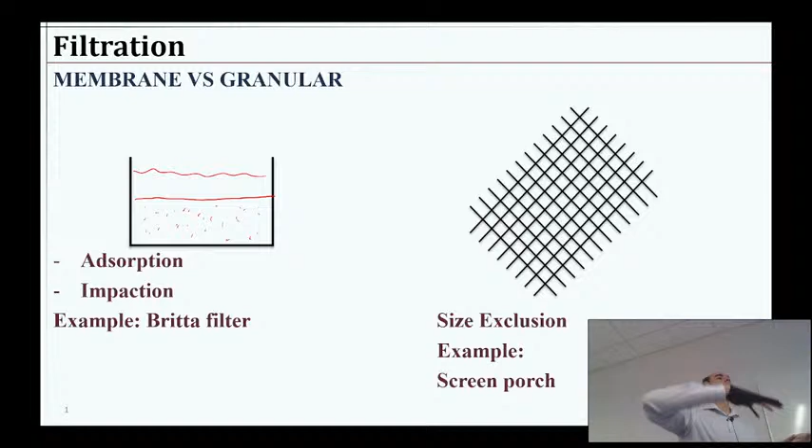Now, in water treatment, sometimes we'll pack it into a column like that for something like a pool. For larger systems, a lot of times we'll just simply let the water accumulate on top of this bed of sand and let gravity drive it through. Of course, we have to pump the water up, so we're using some energy, and the water's coming in and traveling through and being collected out the bottom under normal operation.

Now, these filters have to be backwashed with some frequency. So a lot of the design challenge is how do we know we have enough filters to handle routine maintenance? If they're going to be backwashed every 2 days or something, then how do we know we have enough filter area to accommodate?

So the math for this part of the class is going to be rather straightforward, but it introduces a nice concept of flux of water across that filter, which is the same type of concept we will use for membrane filtration, which we'll come to later. But just as a quick little thing, a membrane filter operates like a screen, like a mesh, where you have a particle in water and it's traveling and it gets stuck as the water travels through and cannot make it across.

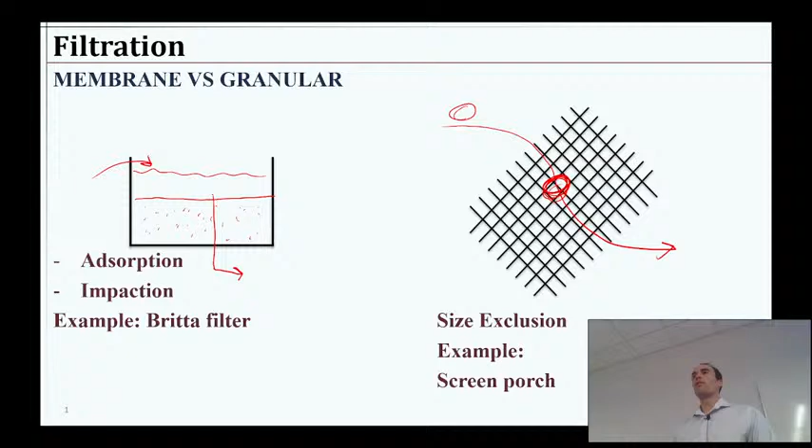That's a little different than sand. In the sand case, we're actually allowing the particle to stick to the edges of the pores or stick to each other and accumulate and grow into larger particles that then get stuck. Most of the granular filtration is not actually size exclusion because the pore sizes are relatively large, but it allows for a lot of area for these particles to stick to the walls, to the sand, to whatever else. And that's very likely because we've destabilized them.

So part of that coagulation flocculation, that coagulant destabilizes the particles, so it helps with sedimentation, but even after then, these particles are still sticky, and if a few of them make it through without gathering into larger particles, now they're happy to stick to our sand. So it kind of does a dual action for us. So it's very common then to use sedimentation, coagulation, flocculation, sedimentation again, and then granular filtration. It's very routine because it just works so well together, and most of that's using gravity and a bit of chemicals.

Okay, so a couple common examples. We can think of actually coffee grounds. So as you pour water through coffee grounds, the grounds are kind of like a media bed, except they're going to release stuff, right? You want the stuff to soak out of the coffee grounds. But they could potentially filter something if you had, let's say, some leaves in your water and you poured it onto some coffee grounds. Well, the leaves are going to get caught, right? So that's the granular filtration, sort of. The coffee filter would be like a membrane because it's physically excluding stuff.

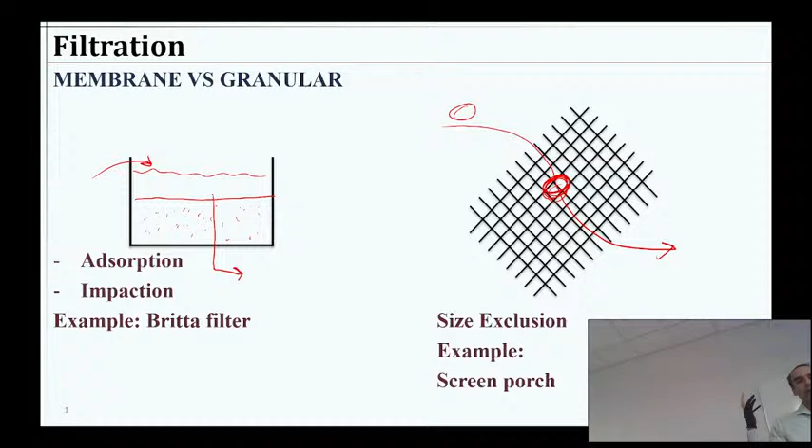That analogy is not perfect, but you've seen Brita filters. It's a better example of this granular filtration. It's allowing space for chemicals to adsorb onto the carbon that's there. Soil's another example. And the coffee filter is a little bit more like the membrane because it's excluding particles based on their size. You can get some really fine particulate matter to go through, perhaps. Or a screen porch trying to keep mosquitoes out.

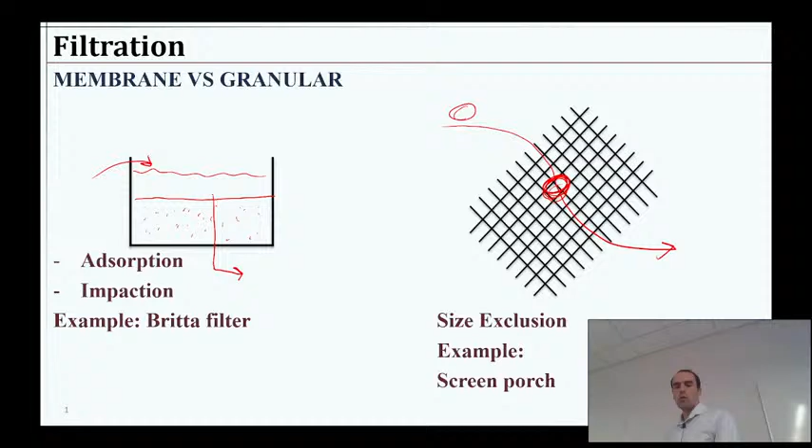Okay, so today we're going to talk about the granular filtration then. I mentioned it's usually not size exclusion. So if we think about what the media might look like, it could look something like this, where we have a particle here. Size exclusion, yeah, it can happen if you have a large particle. Usually those large particles were removed from sedimentation, but if they're there, it could get caught and separated. More often, you're going to have an assortment of different processes that we could talk about.

You might have flocculation within the pores, particles meeting each other. You might have direct sedimentation. We talked about the big sedimentation basin. The particle has to travel some distance before it hits the ground and then it's separated. Well, there's very small distances to settle inside these pores. So if it just settles a little bit along its way and makes contact with the surface and sticks, then it's sedimented just inside the pores of the granular media.

You could have interception, where it's not exactly sedimentation, but as the water is moving along the pores, say here's a granule, a particle along the way ends up hitting the edge because it doesn't move out of the way in time, kind of thing. The fluid just kind of ends up bashing it into the side of the pore wall there. And so you could have interception like that, or impaction, where kind of the same deal, the water moves and the particle slams into the granule.

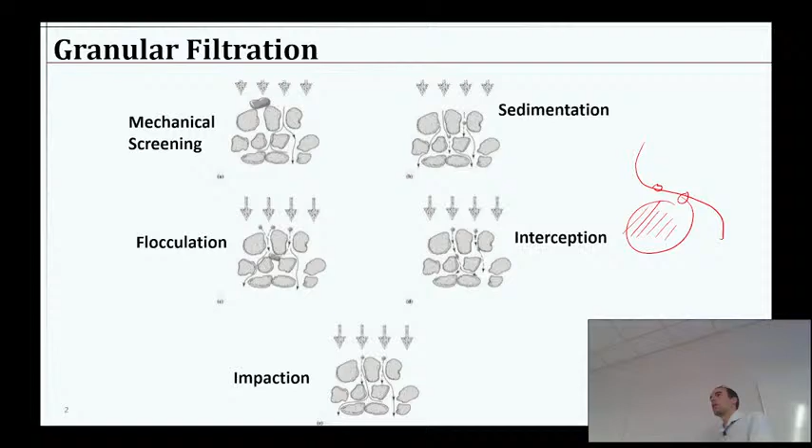It's a little bit like using Velcro, right? Adsorption processes are a little bit that way. If you have some Velcro and you shove a lot of dust and fuzz on it, eventually all the sticky spots will be filled until you remove all the dust and fuzz and stuff. Then it could be sticky again or grabby.

So that's going to be the same type of concept that's happening in granular filtration. Now, here's a couple examples. Normally, I have this pilot system in my lab. Somebody's borrowing it to use it for some test stuff; a consulting company's borrowing it right now. But if you're very interested, I could probably hook you up with a visit to go see it wherever it is. It's not too crazy of a system.

This one's 3 columns packed with some granular media. You can see them, in practice might look something like this. We'll look at a few examples as well in a moment that are the bed variety. So I mentioned these would be the column ones. The reason you might want a column, you could probably push it a little higher pressure, meaning higher flow rate, but there are some limitations.

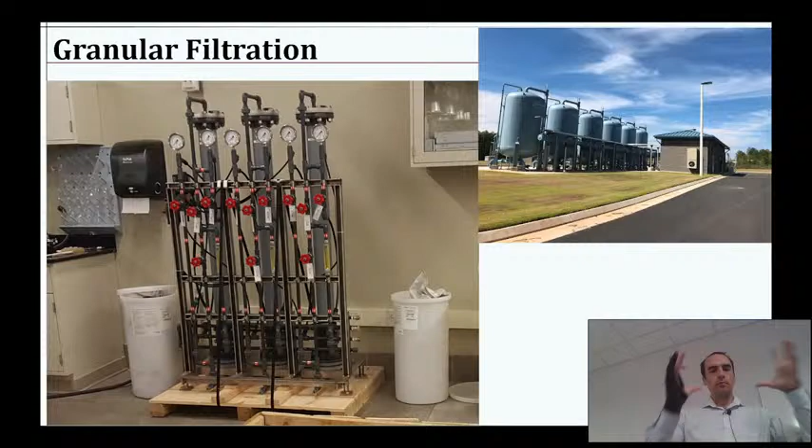If you put too much pressure, eventually the sand is just going to give away and fissure, and then you're not getting any filtration. It's just channeling through it the most direct, shortest path possible. So you have to operate these in a careful manner, to prevent any short circuiting or anything like that. But a confinement like that does help.

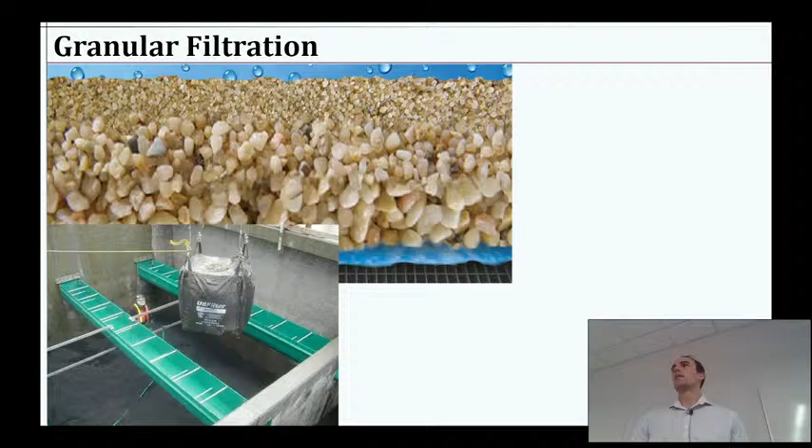So considering how well the media functions, does it ever need to be replaced? How sticky is it, given the type of particles we have in the water, things like that. Operators might have a few choices on, okay, how do we design this? What are the cost benefits? And they're going to need a lot of that material. And ideally, you don't ever replace it. And so in operation, you're doing your backwashing in a way that you shouldn't be losing any of this sand. You shouldn't be flushing it so fast that your sand is escaping with the particles.

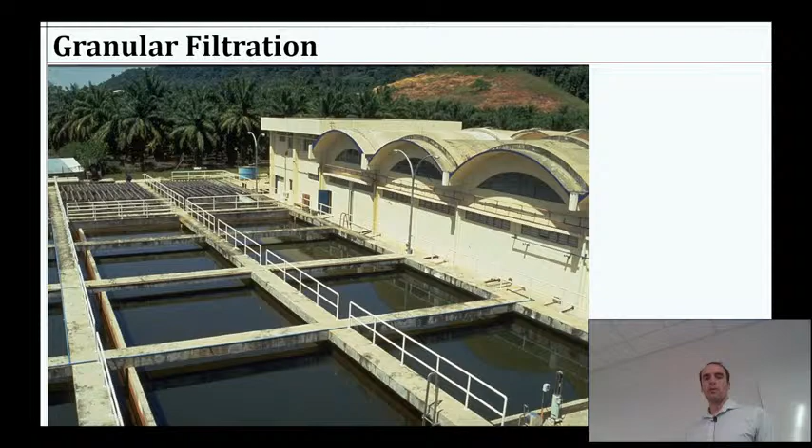A few more examples of what it might look like. I have no idea where this is, but it looks like a nice place. You can see these are just large beds, and they just have water piled up, and the water looks pretty still, and perhaps that would be a sedimentation basin, but I think these are multiple granular filtration beds where water is seeping down through continuously, and eventually they would stop that and backwash it. We'll give some examples of that.

Okay, so when did we first start using granular filtration? Well, as soon as we were using groundwater is the simple example. But really, in terms of intentional treatment, I think the earliest sand filters were actually what we would call today slow sand filters, or maybe bio sand filters, meaning that we give the water a lot of time with a high surface area material. There's going to be some of that filtration, but because we didn't have the sophistication 150 years ago to backwash and pump stuff, we would let bacteria eat all the particles.

And so there'd just be continuous bacterial activity as we're letting water go through. And that's not a great thing because we've then got a lot of bacteria around, but hopefully it's at least going to remove a lot of the particles, and the bacteria that are growing in the sand are not so likely to be the same bacteria that would give us an infection. So it'd be a little benefit, better than just taking untreated water. So that's even today sometimes used for biological treatment, but not really something we use for drinking water anymore. So that's kind of the history.

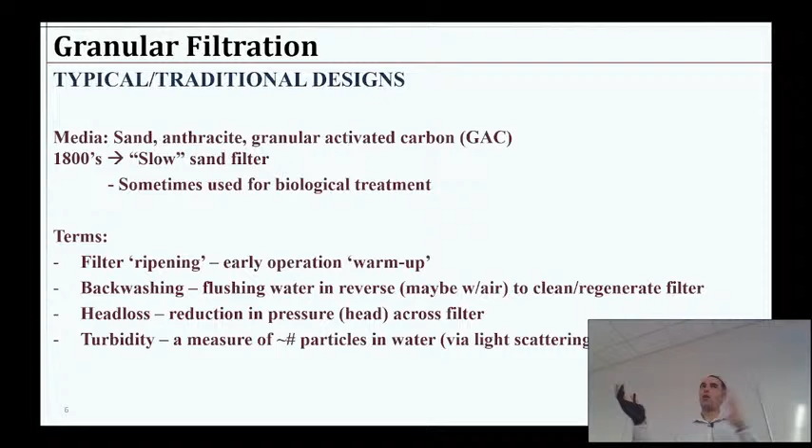during operation, you can imagine if all the particles were just jostled about and backwashed, there might be some junk still hanging out. You have to get rid of that before you're ready to use the water. After maybe 20 minutes of operation, or in the case of the Brita filter, maybe like 5 jugs full or something, you see that most of those gross looking particles are gone, and you're like, okay, I guess it's safe now, right? It turns out those particles are pretty safe. It's just, you don't want to drink them, right?

So in that case, that's the ripening stage. You have to flush out all of that stuff. It's kind of a warm-up or acclimation step. This is dirty water coming out at first. So we don't want to use that. So that water goes to waste. That's not something we're going to use for our drinking supply.

Then there's backwashing. That's kind of obvious, self-evident. We're going to use treated water because we're trying to clean these filters. So we're going to use treated water, which means we are consuming some of the water we just produced, and flush it in reverse. We might also do an air purge. We'll see an example of that. And that's going to clean and regenerate the filter. Now, ideally, we can do this ad nauseam, as many cycles as we want. And that is generally the case.

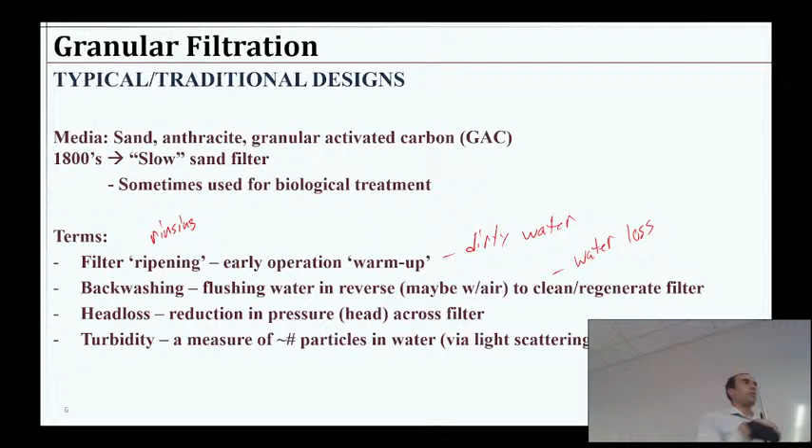So if you think of visibility through air or into water, any of you travel out into the ocean, like way beyond the Mississippi effect area, just way out. So if you travel far away, like into the Gulf or into the Atlantic somewhere, if you get away from all the sediment that's in the water, you'll end up finding very clear water. Certain locations that don't have much sediment, even close to the shore, can be like that.

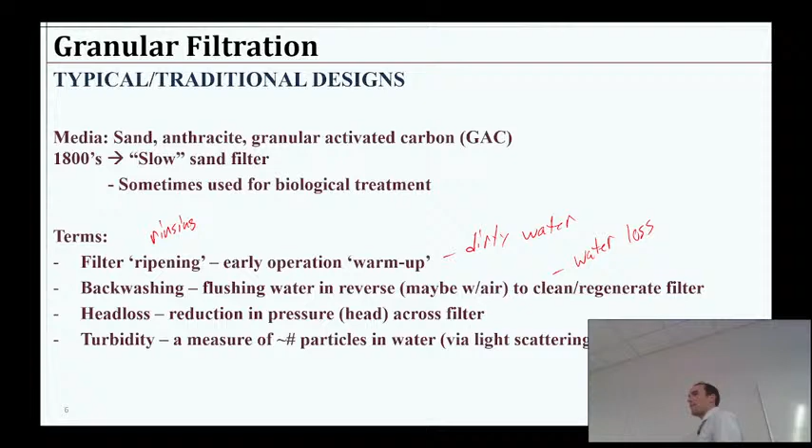Certain natural springs, not a lot in Louisiana because we have mostly sediment here, right? Years and years of sediment from the Mississippi everywhere. So in some places, you'll find water that you could see 20, 30 feet through, right? It's nice, clear, looks like stuff you might want to drink. Other times, you'll find water that is very cloudy or murky, and that's turbidity. So turbidity is a measurement of that light scattering caused by particles.

Another good example would be if you take tea and it's been filtered nicely, you should be able to see through it even though it's colored. That's different than having a brown muddy color, meaning you can't see through it like you can see through tea, right? You could look at rivers in the same way. If you have a very low turbidity river, but it might have a brown stain, it would look brown, but you can see clearly through it. That's possible.

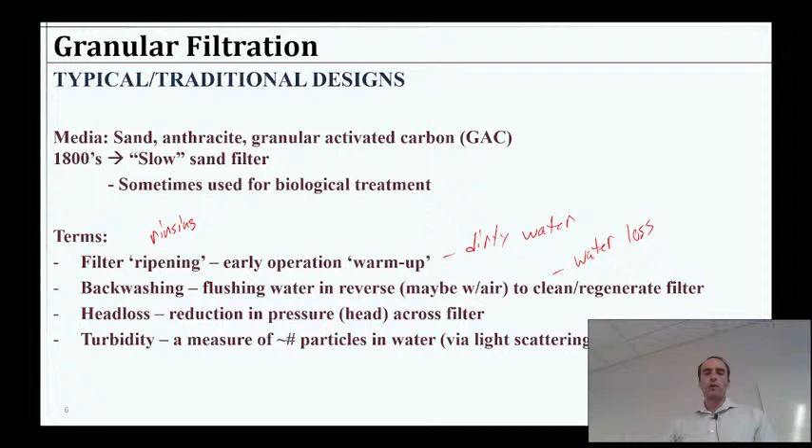So milk is very turbid. You can't see very far through it. There's particles scattering that light. Okay, so turbidity then is a measure of particles in the water. It's like a concentration kind of a deal. It has this funny unit that we call nephelometric turbidity units.

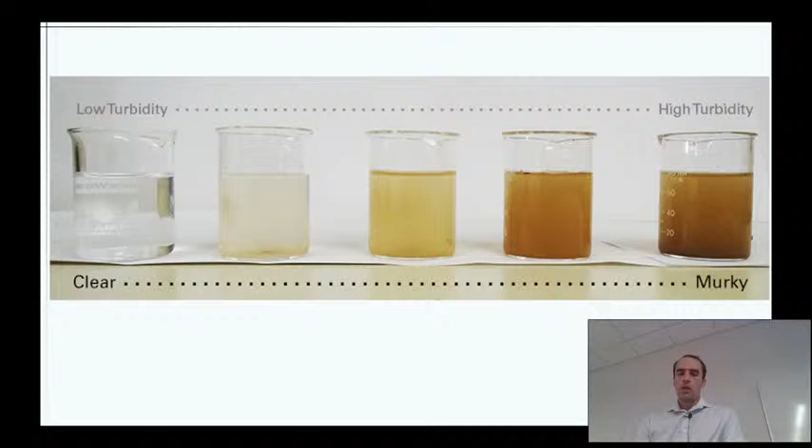Good example here of turbid water. So we have clear and increasingly high turbidity. Again, it's basically saying murky. Okay, it's just the technical term for that. A way to measure it is to measure how far you can distinguish this, like a black and white edge, as we see on this little Secchi disc thing. How far through the water is your distance, is your visibility.

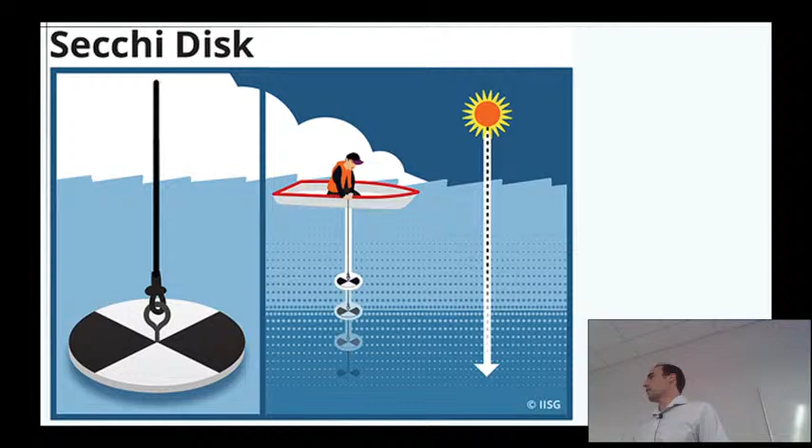So people will literally go out and measure that with a rope and see, okay, at this point, I can no longer really distinguish what's the white part of that and what's the black part of that. And that's a simple way to see what's your visibility, and then use whatever metric to say, okay, that's this number of turbidity units. So it's a little bit arbitrary seeming in terms of how we define the units, but we can quantify it with the amount of light scattered in that manner.

So it might look something like that. And as you see, you can imagine if you drop that further in from that point, it's probably going to get to a point where you can see that it's there, but you can no longer see exactly where the edges are of the black and white spots.

Okay, so then probably the most important variable for our granular filtration operation is what frequency do we backwash? When do we backwash? How long is it going to take? How much water are we going to use? What's the impact of that backwashing? That's going to drive a lot of our design for a granular filter.

So in order to determine when we backwash, there's kind of three methods, and usually we'd use at least two of these. One would be head loss. The next would be just a simple time limit. And the last would be monitoring that turbidity. Because if we have turbidity coming out of the filter, we know that our particles are starting to escape. So that's going to tell us at some point we need to wash because the filter is kind of full of particles and they're starting to make their way through.

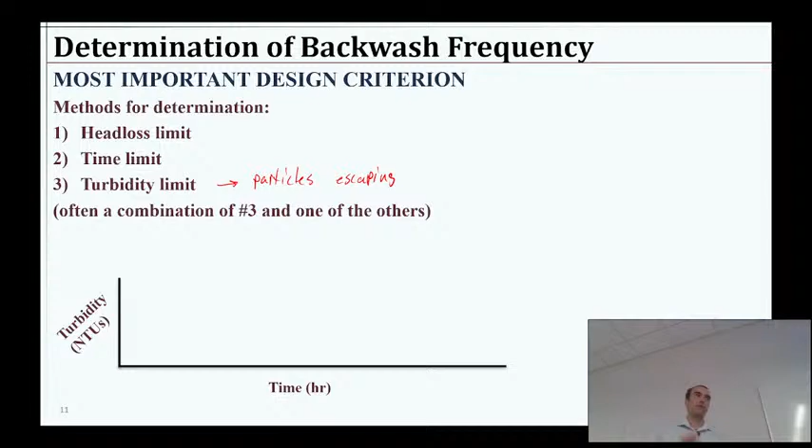So turbidity limits then are usually a kind of safeguard. We typically will have online turbidity monitoring, and if things are going well, that will tell us if there's some problem with the filter. Maybe something else happens wrong and something gets out of place or is not working properly and a filter malfunctions. We'll see that turbidity coming out, and that will be a way to tell us, oh, okay, we need to stop that filter operation right now and backwash or maintain it accordingly.

There is a reading assignment I'm going to post to Moodle. It might be there already, and I'll have an associated quiz later on in a week or two about a big cryptosporidium outbreak. Cryptosporidium is a pathogen.

We might call it a parasite because it's a slightly larger cell than a bacteria. It's a eukaryotic cell, harder to kill. Giardia and Cryptosporidium are the common hiker's diarrhea things you hear about.

So anyway, it's a pathogen, and there was a very big outbreak in Milwaukee in the early 90s that affected quite a lot of people, and one component of it was that their turbidity monitoring was not going on. They were using granular filtration, they weren't operating it well, and they didn't realize they had a lot of particles escaping, and essentially they concentrated the pathogen and sent it out into the distribution system by mistake. So that was not good.

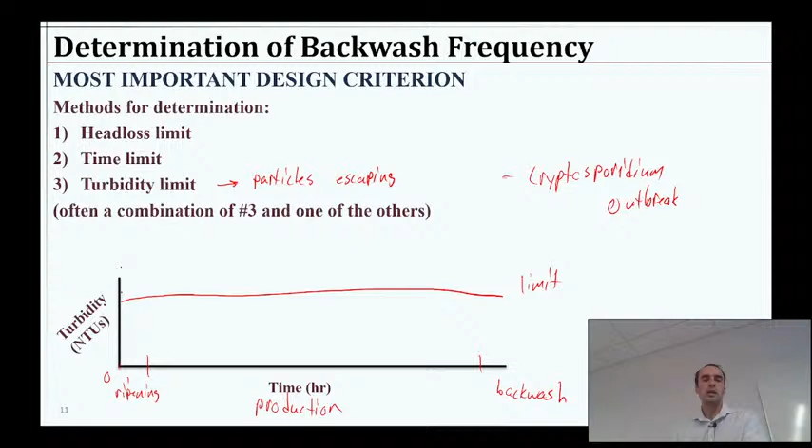So if we monitor the turbidity throughout rinsing and then production, let's set a limit too. Let's say we have a turbidity limit here. Pretend that's a straight line. And we'll monitor the amount of particles, essentially the turbidity coming out of the filter. Well, during the ripening phase, we're usually over the limit, right? So for the first few minutes, maybe first half hour, we'll be over the limit, and then it should drop. By the time we start production, we should be back under the limit.

And then it should be pretty stable for a long time, and then slowly start to rise. And as soon as we cross, we should probably stop and backwash. So if our typical time was to start backwashing over here, maybe we need to shift it earlier the way I drew it, right? At this point, we've reached our limit, and that would be a signal to do a cutoff, to stop filtration. Now, normally we'd design it so that our turbidity limit doesn't normally happen before our time limit if we're going to do a time limit. So a lot of the cases we'll talk about, we're just going to set a time limit and describe it that way. So that would be the implementation of a turbidity monitoring and limiting type of system.

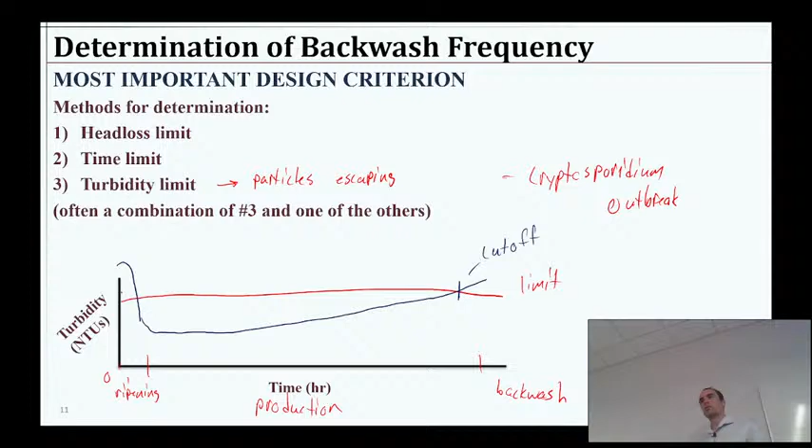Now the operational time can range anywhere from maybe 24 hours to 3 or 4 days, maybe 100 hours, before you need a backwash. It really depends on the system and how dirty the water is. Typically, you'll have at least a turbidity limit, and then either the head loss limit or a time limit. Sometimes you might have the time limit and then monitor head loss and turbidity to do it that way.

Okay, so let's do the same consideration for head loss and take a look at what that might look like. I'm also going to be a little more clear here about one cycle. So if this is our start, we would have some time frame for the rinsing and ripening. That might be something like 15 minutes. Then we have production, anywhere between 24 to maybe 96 hours. Those are not hard and fast numbers, but that's a typical range. And then we'd have backwashing at that point.

If we add in an air purge, we're going to drain it and then pump some air through it to jostle the sand really well. That would probably happen first. So we might account for air purge optionally. Now, in an air purge, we're not using any water. So when we calculate the water usage, that's time we're taking that's not producing water, but at least we're not consuming water.

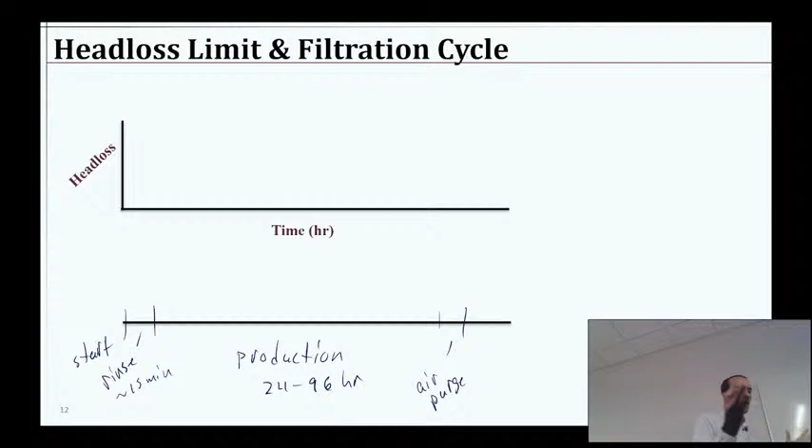So as we think about putting all the pieces together, it's not super complicated. We'll need a total cycle time, and we'll need to know how much water we're producing over that cycle time, and we calculate it according to the time we're producing, the time we're not producing, and the amount of water we are taking away from what we produced, and averaging. So we might have a production rate, but only 95% of the total cycle time is actually producing, right? So we just have to account for all the pieces like that. And then finally, we'd have a backwash. The air purge would be like 5 minutes.

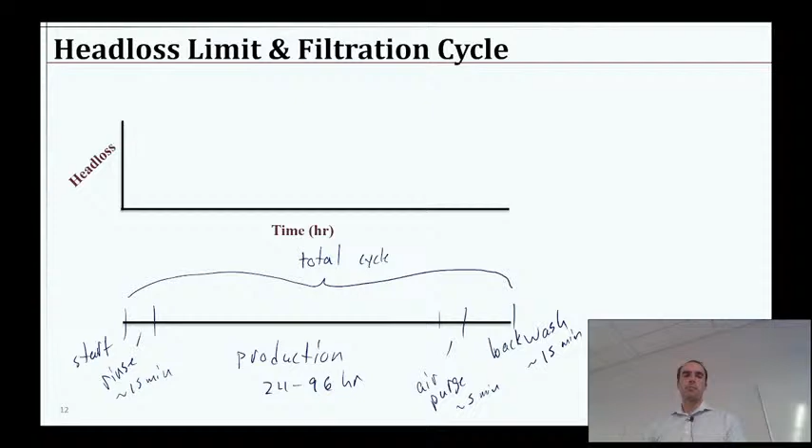And a backwash would be something like 15 minutes. Okay, so if that's our total cycle, typical, we could then say total cycle time, or TC. So that time frame might be like 100 hours or 97 hours, something like that, or maybe 25 hours. Maybe we just call it exactly 24 hours and our production time is just a little short of that, right? Could be any of that.

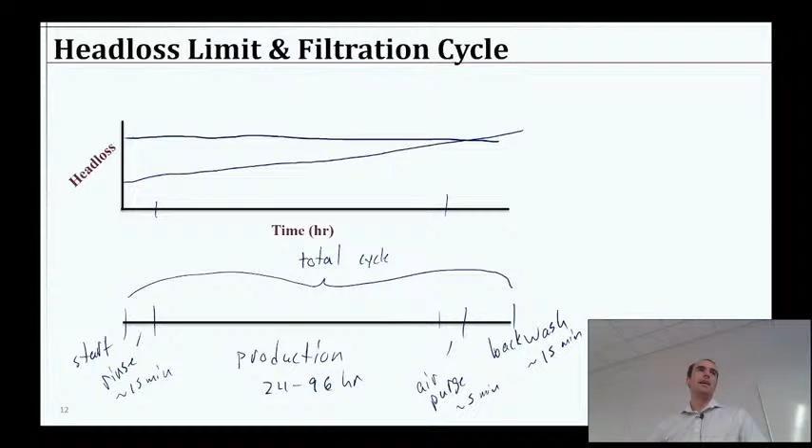Okay, so head loss then, if we track a similar trajectory here and cut off for backwashing, air purge here, rinsing up front, maybe we have some head loss limit here. Well, as soon as we finish the backwashing, it's going to be pretty easy to wash water through it. Even if particles are coming together and the granules are finding nice spots, the head loss is just going to be pretty low at first, and it's going to be steadily climbing over time and eventually reach a point where we would have to stop operating. So pretty straightforward. There's no reason that we have a head loss limit during the rinsing stage is kind of the point there.

Okay, so I want to give you some examples of what this would look like in practice, so you have a little more feel for it. I think I have plenty of time, so we'll probably end a little early. But let's take a look at a couple of videos to give you a feel for what this looks like in practice.

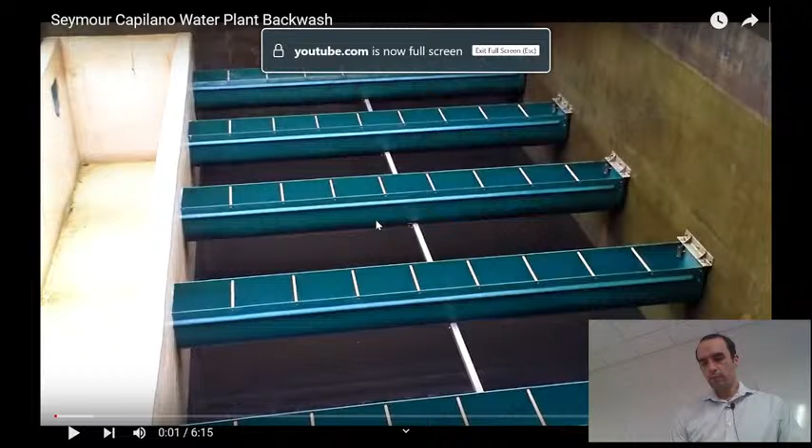Okay, and pardon me for just a moment while I make sure the sound is reasonable. We're not going to watch straight through all of this, by the way, because it gets a little tedious. But we'll watch a fair bit of it. I might adjust the lighting too. Okay.

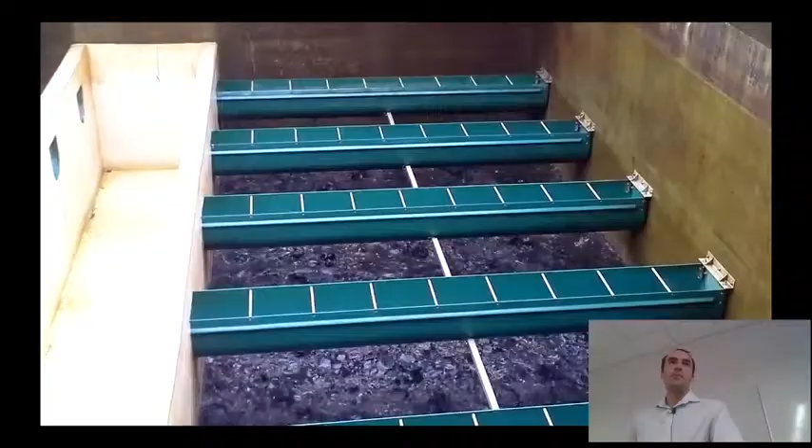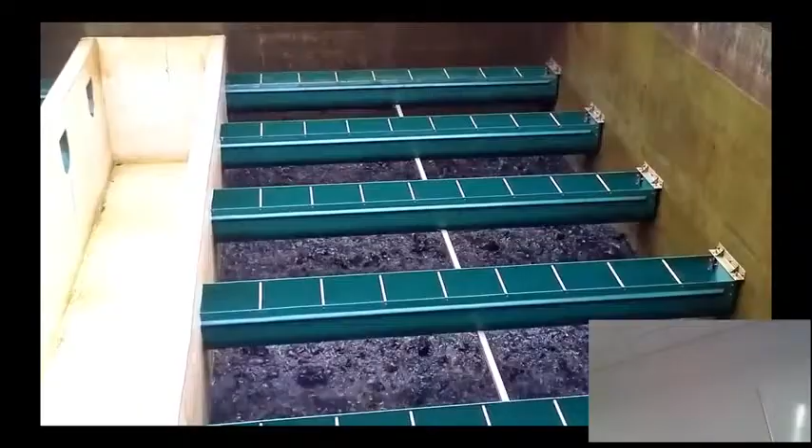All right. So this first one includes an air purge, as we'll see. So you can see the air bubbles pumping up through there and making this nice, gross-looking slurry. Gotta have high-quality gross bubbles, right? Okay, so that process will really just go for about 5 minutes maybe, so we'll skip forward a bit. So it continues for a bit.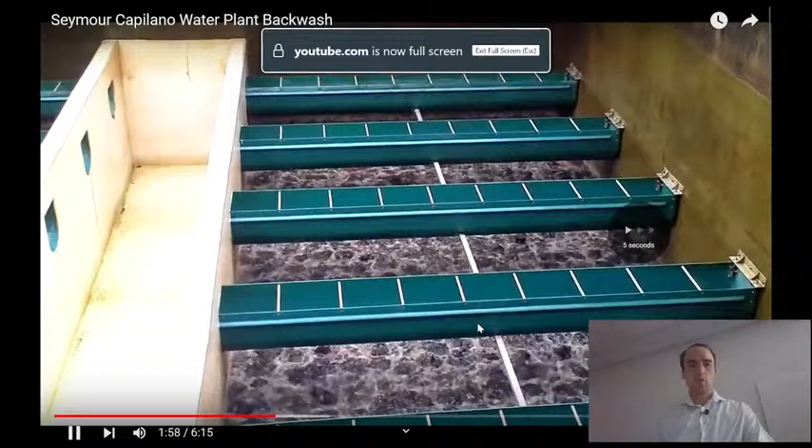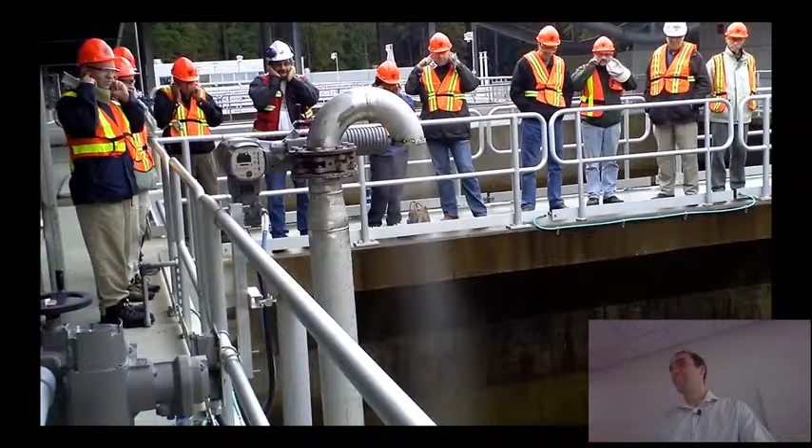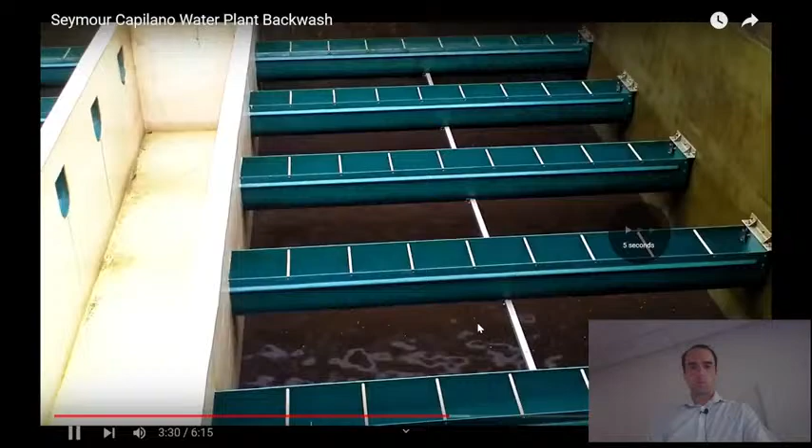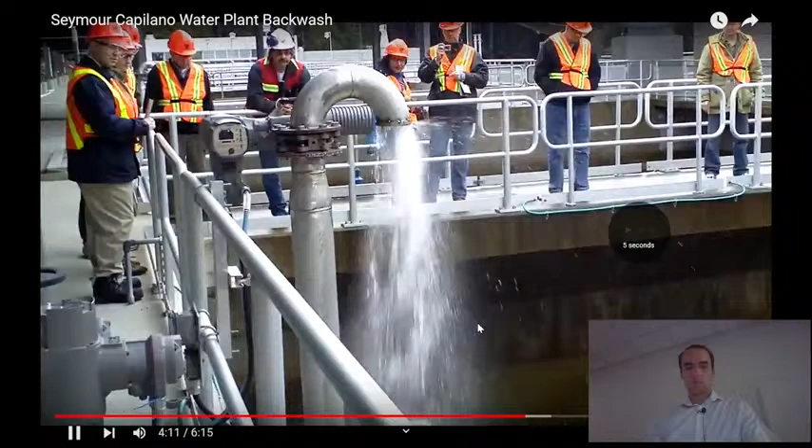And at this point, I'm going to mute it altogether because they're going to purge the pipes, and that's a very unpleasant noise. So they're getting all the air out of the pipes that they just had in there to do the air flushing operation. Still going for a minute. Okay. So then they finished getting the air out. Now they're going to start pushing the water through, and you'll see all the residual air bubbles from the water start coming up.

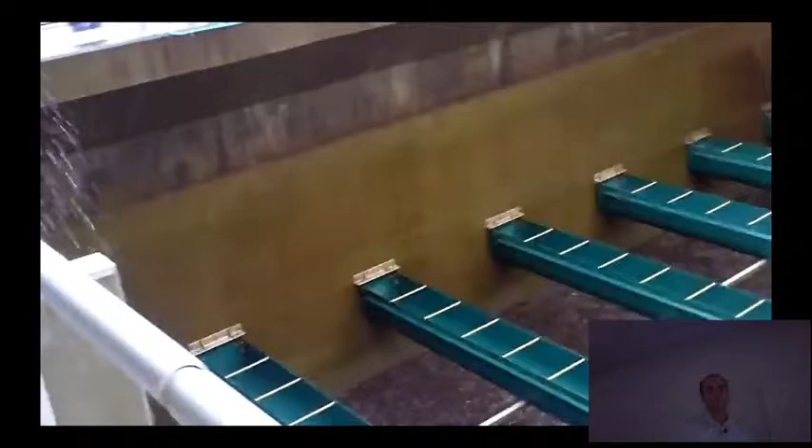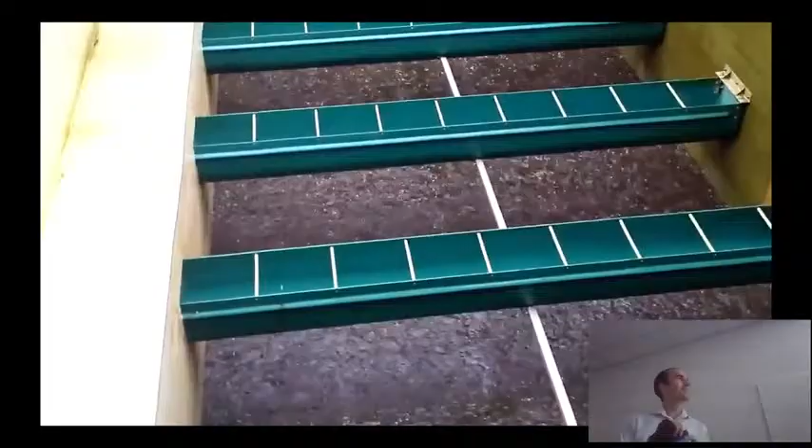One of these people, you can hear them make a funny comment. Film the water for a bit. It's all bubbly. This is how they make root beer. Giant.

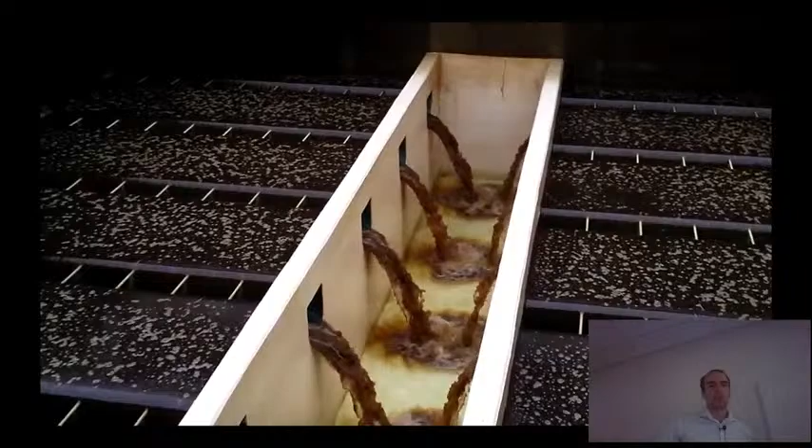So in just a moment, the water will really start coming up because they're gonna push it up at about the same rate that they would normally feed it. And there's your delicious-looking root beer, right? So all that particulate matter was in the river or whatever it was feeding this treatment, right? And this is after sedimentation has occurred, presumably. So it's catching a lot. Of course, this is many hours of operation, but it's quite a lot of junk there.

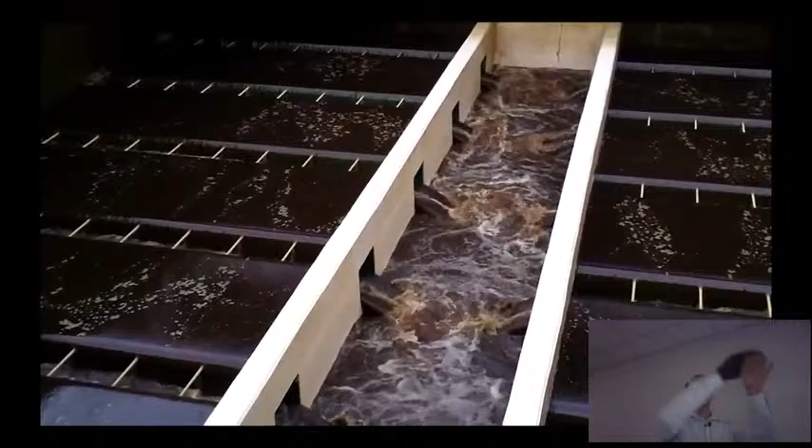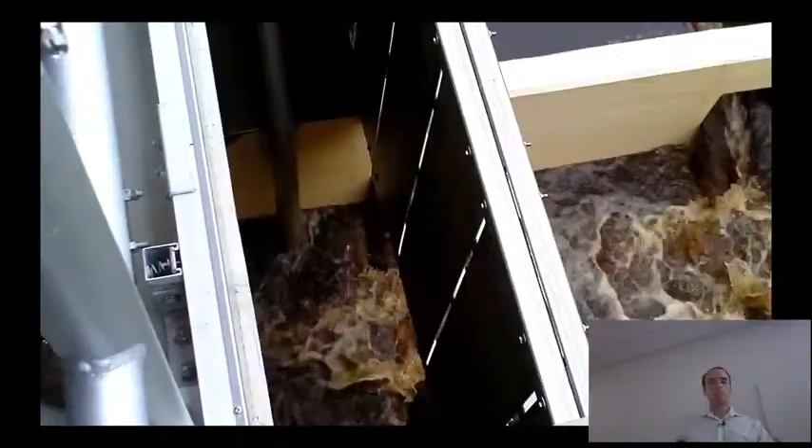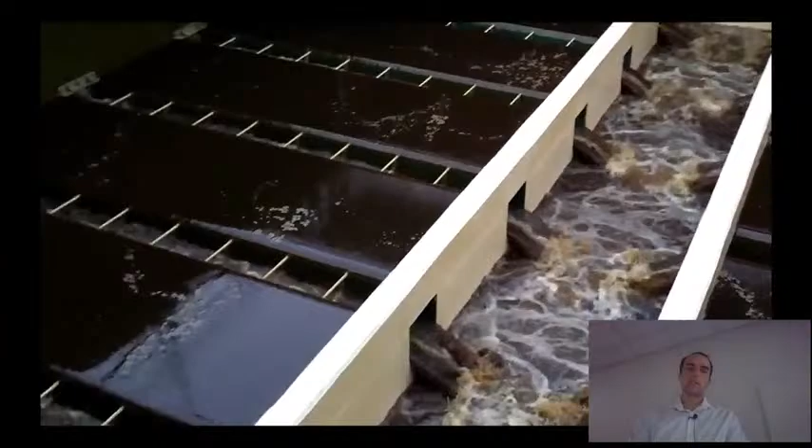And these troughs, by the way, this is a very common design. Where it's feeding out right now is normally where you'd feed in, and then it fills these troughs, and flows the dirty water on top of the filters, to push through the filters. So in this case, it's literally reversing. They're just going to change the pipes around a bit so that it's coming back out the way the to-be treated water is normally coming in. So that'll go for some time, and then eventually we'd see it clear up. The next video I have shows the clearing of the water a little better.

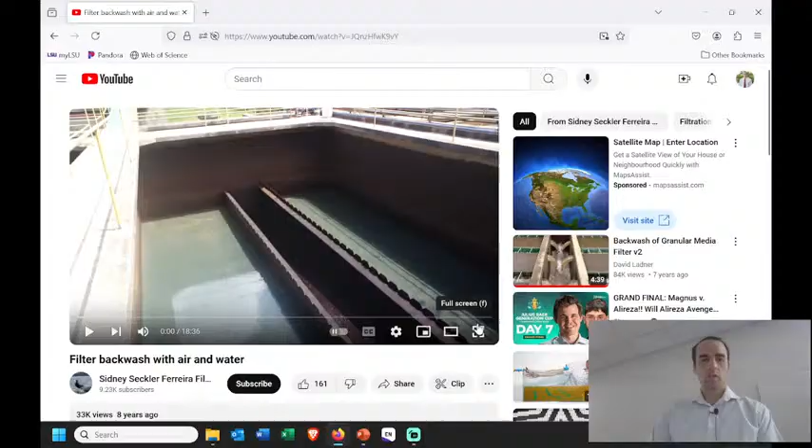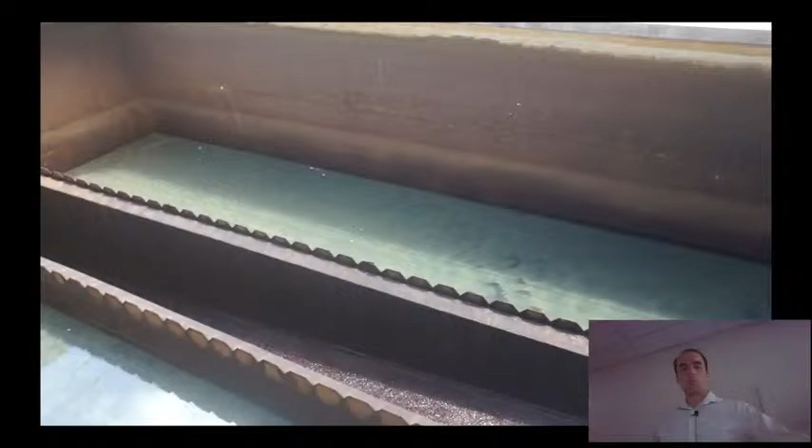Okay. So we're definitely not going to watch the full 18 minutes of this one. We can see a similar design here with a trough in the middle and then these little grates to let water flow through evenly over and across them. So the backwashing is just beginning now. I don't think they did an air purge. I don't think they're planning to. And the water will just come out that trough. Actually, I could be wrong about the air purge. We'll see.

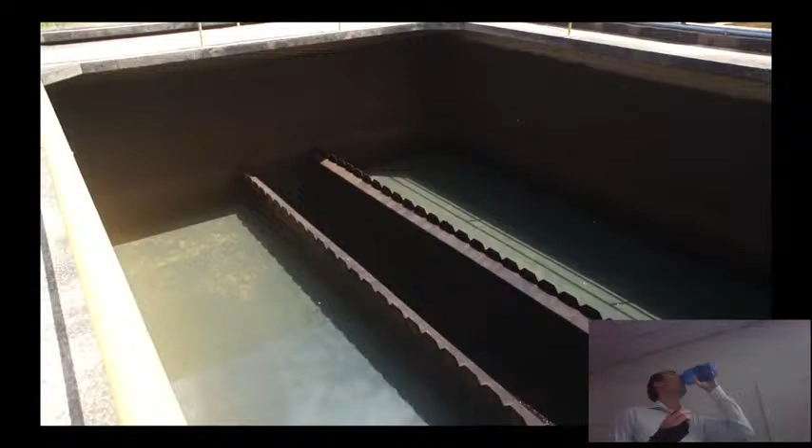You see that the color change, starting to see some orange. Okay, there we go. So now you can really start seeing its orange particles coming out as the water is being pushed up. Okay, so there is an air purge. So air purge will go on for a little bit of time.

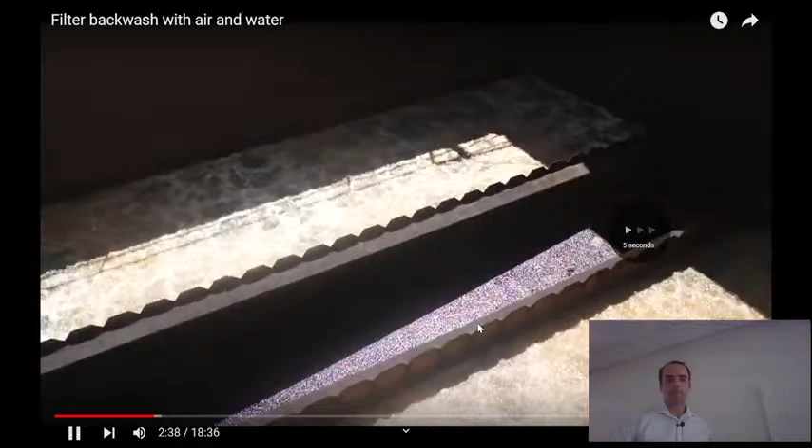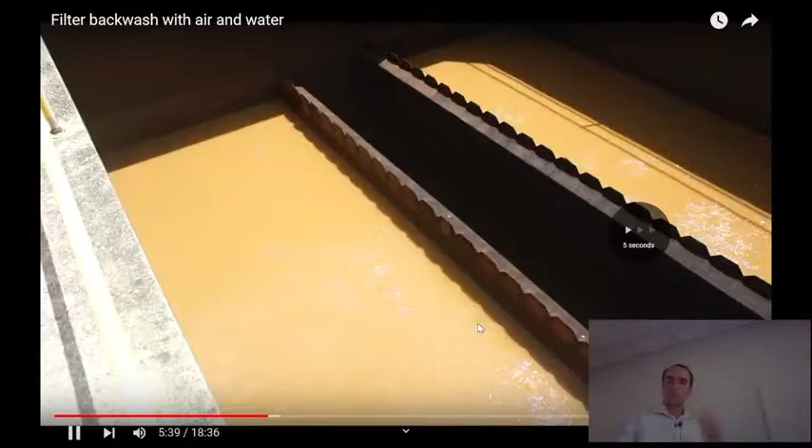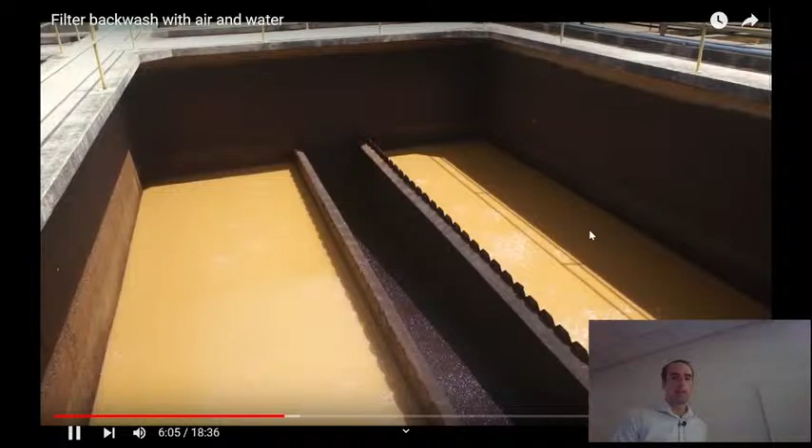It stopped the air purge. And you can even see on the video, well, maybe you can't see it. On my screen, I can see it's been 6 minutes of video time so far. And this is where we're at, right? Okay, they finished the air purge at this point, and they're gonna just push the water through. That's probably the next 15 minutes of the video.

We'll skip through, but you can see the particulate matter in this case looks a bit different. Now, it's a different color. That could be a different coagulant they're using, or that could be just a different geology of the area. Different types of mineral content, different types of clay particles. A lot of this stuff that we're seeing is probably some combination of the local sediment, clay, whatever particles that were in the water. And so it can certainly look a bit different.

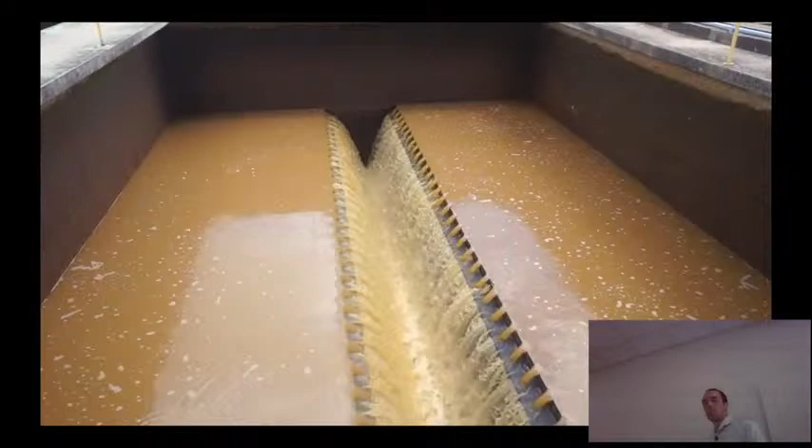Some places will use ferric chloride as a coagulant. Some places will use aluminum sulfate, which is probably more like this color. So could be a function of what kind of coagulant's used. Okay, so then this will go on for some time, and it's pretty neat though. As it gets towards the end of the video, we'll see it clearing up a bit. Kind of a neat effect.

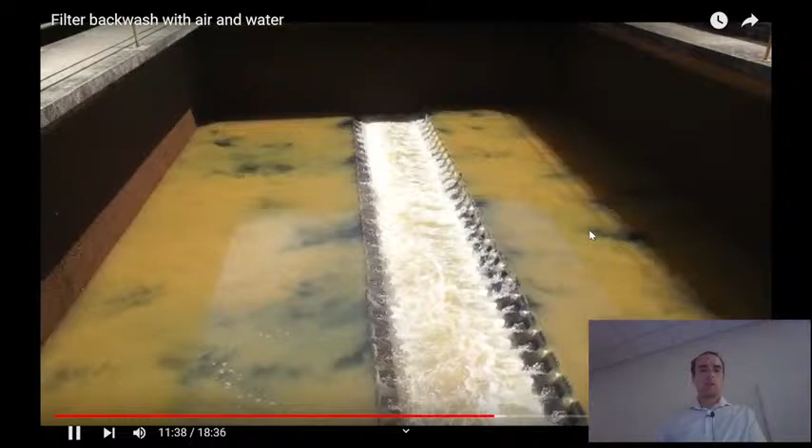So just skip forward about 2 or 3 minutes, and we can already start seeing patches where it almost looks like it's getting dirty in those patches, but that's actually probably where it's less turbid, because then we're seeing through the water a little further at these dark spots. Gradually improves.

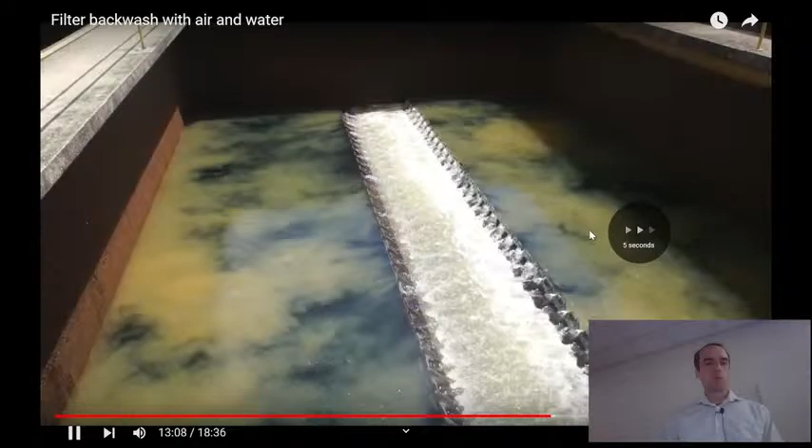They stop and take a look at filter beds that are in operation over here, and what you notice is you don't even see the trough here because there's just water on top of the whole system. So there's enough water that it's pushed into there, and it's pushing its way down through the two beds, and it's coming into that trough, and the only place water can go is through the beds. That's kind of how that's working. So cleaner and cleaner.

Until you can pretty much see the sand or the media itself. And at that point, I think we just crossed that. So right here you can see, at this point I think they stopped the backflow, and pretty soon they will start pushing water in. And at that point, you'll end up seeing all the particles sink back into the media because now the flow has reversed and it'll end up clearing it up nicely.

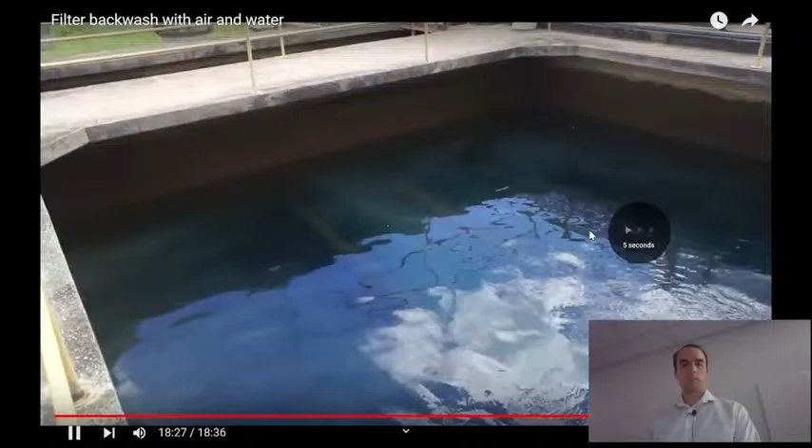Yeah. Okay, so I'm going to say a couple more things real quick. Probably ought to have gotten the other slides ready, but we'll just let you off a little early today.

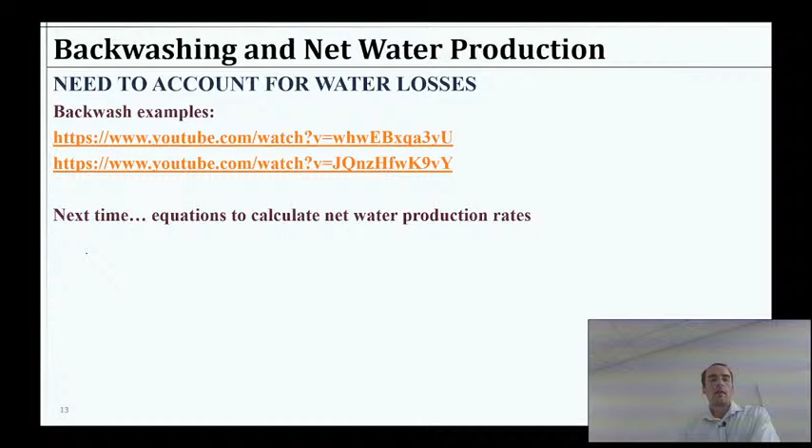Ultimately, what we want is some equation for the water efficiency for this. So we'll need water efficiency for the filters. And we're going to need to know not just the efficiency, but the actual amount produced. So we'll need water efficiency, some handle on the net water production, and that net water production is going to be coming from some number of filters, their size, and the amount of time they spend backwashing. So it'll account for that.

It'll account for the time in operation. So in one cycle, how much of that time are they producing water? How much of that time are they not doing anything? How much of that time are they consuming water that was already produced for the sake of backwashing? So there's several questions about that. And we just have to put all those pieces together to properly say, to design something for these specifications that needs to produce X number of cubic meters per day, we need this number of filters, and so on.

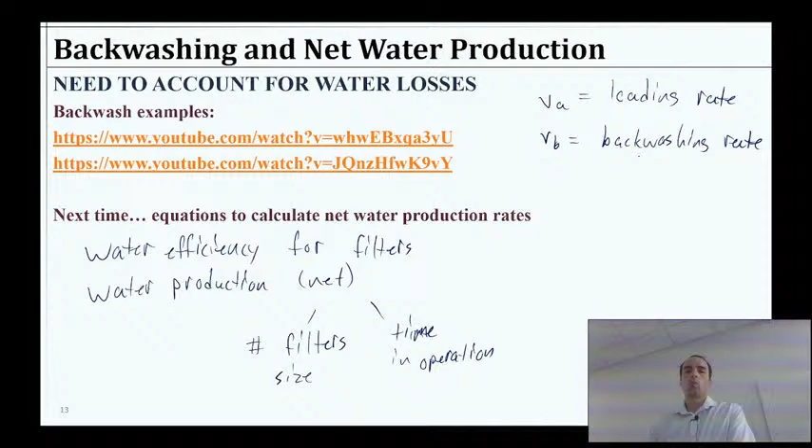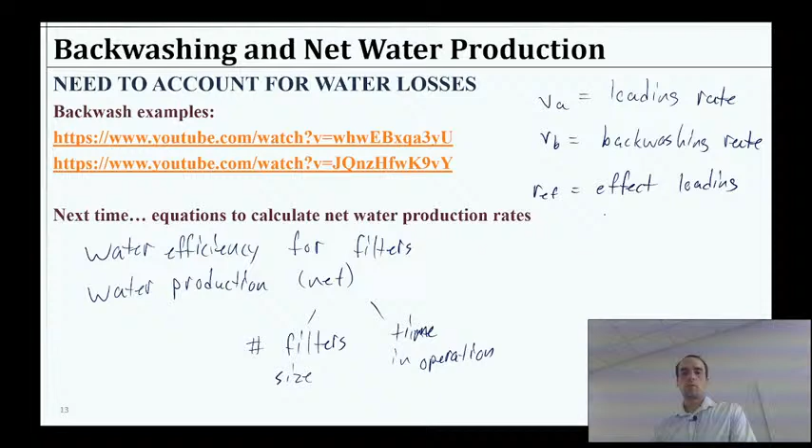We will look at terms that include a loading rate for a filter. We'll call that VA. We will have a VB for a backwashing rate. And then we will also have an effective loading rate, because the loading rate itself is during the filtration. If we accommodate for the whole cycle where we're not producing water the whole time, that becomes an effective loading rate. It's rather simple math, but it can get confusing if you don't have a handle on what we're talking about. Okay, so we will pick up there and explain all of that next time.